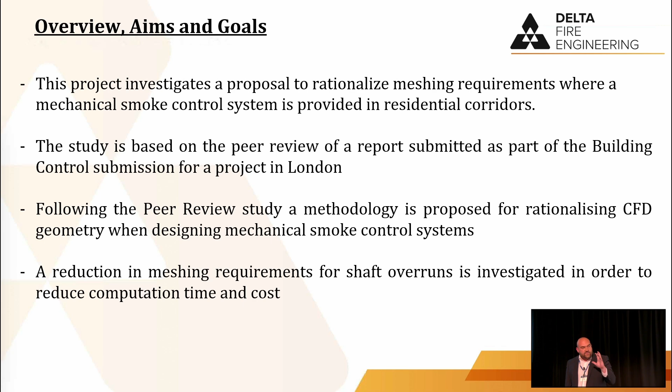So for anyone that was here yesterday, I said that what I like to do at the start of all my talks is to convince you why you should care about the next 13 minutes, 45 seconds. This study, I'm going to skip over this one and come to this slide, is really intrinsically related to this fire, the Grenfell Tower fire. Now, I'm sure we're all aware of this one. Certainly if I was doing this talk in London, everybody would know. Loads of people I speak to were there. I was there the night that the Grenfell Tower fire happened. I lived in London. I went down to the fire, saw it firsthand.

Our industry changed overnight, certainly in the UK, practicing as an engineer in London. It was a huge seminal event for us. 2 weeks ago, we got the final inquiry report. Our industry changed again overnight 2 weeks ago. The reason that we're so interested in residential fire safety and residential modelling, which is what my talk is about today, harks to this incident, and this highlights some of the issues that can go wrong when things are designed incorrectly.

The Grenfell Tower fire. Grenfell Tower itself was constructed back in the 1970s. It was overclad in the early 2010s, with a combustible material. I'm sure that this narrative is familiar to us all. On the 14th of June, 2017, a little over 7 years ago, a fire happened in a refrigerator in flat 16, which broke the window, melted the UPVC, spread to the external cladding, and engulfed the building.

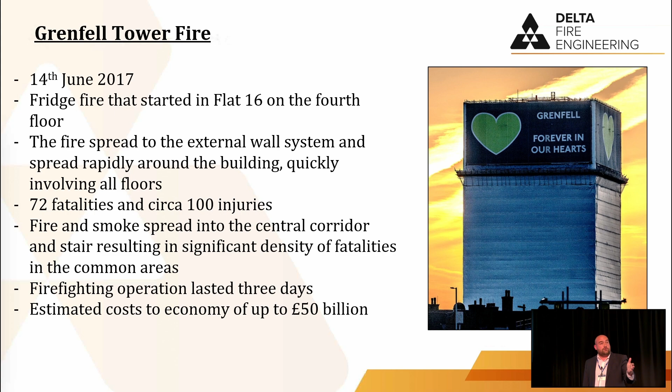72 fatalities, 71 of which were on the night, 1 was later, and over 100 injuries. The estimated cost that's been released recently to the UK economy is upwards of 50 billion, with a B, 50 billion pounds. The UK government themselves have released 5 billion pounds to reclad buildings similar to Grenfell across the UK, and that's a huge package of works at the moment that we're seeing in our industry.

So as I say, I always try to sharpen the mind a little bit to see why we care about this subject. I added a couple of slides last night, actually, based on some discussions I had with some of you guys. I'm acutely aware I'm not in the UK anymore. I'm very much in Kansas. And some of this is not known. So a really quick run through of how this works for us in the UK, our building regulations. It's one slide, I'll do it in 10 seconds.

Our requirements are completely functional, which means we are told what we have to do, but not how to do it. So our functional requirement for fire safety for all buildings in England and Wales, and Scotland in fact, consists of 5 things. We have 5 requirements for fire safety, called B1 through B5. B1 is means of warning and escape, B2 is linings, B3 is the structure, B4 is external fire spread, and B5 is access and facilities for the fire service.

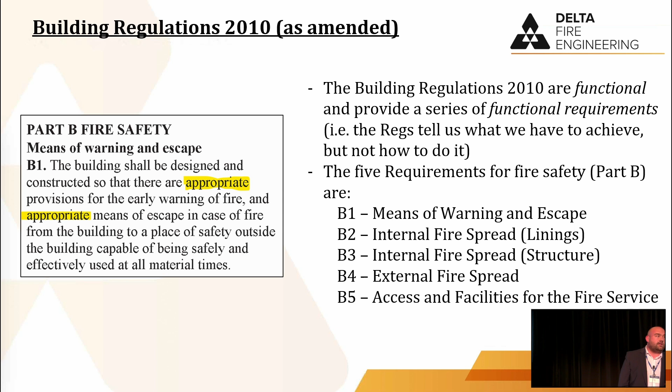And what that requirement actually consists of is what's on screen there. That's our entire legal standing in the UK for fire safety for means of escape. It's one sentence. We design buildings around that one sentence. If we are prosecuted for breaching it, we are prosecuted for being in breach of that one sentence. And the word I always highlight in there is appropriate. Appropriate is not defined in the UK regulations, or in any guidance, really. It's up to us as designers to define that ourselves.

And when we are doing that, again, this is a very quick summary before I get into some of the bits we've looked at for this piece of work, we broadly have 3 approaches. We have codes and standards as we'd have anywhere in the world. Our Approved Document B is our standard prescriptive guidance approach, and we can design buildings to meet that guidance. It's inferred that if we follow that guidance, we are satisfying our legal duties under the building regs, and we can follow that established code of practice.

Alternatively, the job of an engineer, which is what I consider myself to be, is to do performance-based design. First principles, what we're all talking about here in our presentations and in the bar afterwards. True engineering from first principles. And the other type of design that we may undertake is comparative analysis. We do a benchmarking exercise.

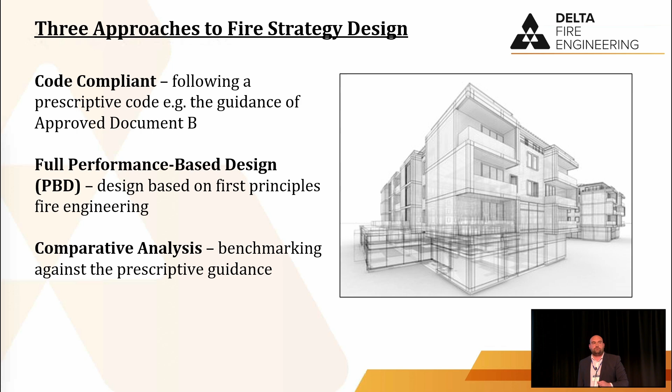If this is the level of safety that would be accepted under prescriptive guidance, and we can demonstrate that we are as safe or safer than that guidance, we've carried out an engineering judgment and said that this meets our statutory duty. So far, so straightforward, I think. And I'm going to hone in on that comparative analysis for the rest of this talk. So, Approved Document B looks like this. This is what it would tell us for design of a single stair building.

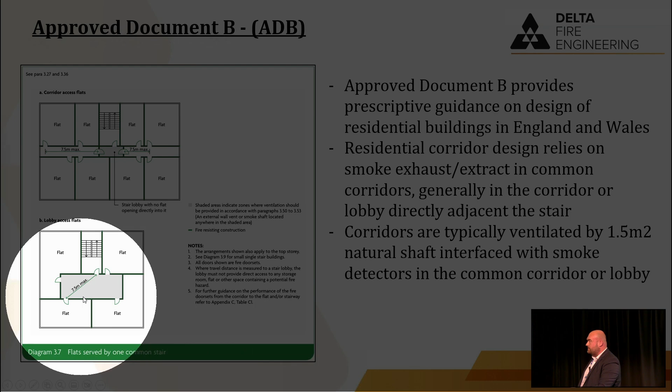The image down at the bottom there, I'm going to try to do a Rishon here. How did you do the thing where you get the click? Look at that. No one told me this yesterday. I was waving my arms around yesterday. I watched the video back. I look like a right muppet. Anyway, I found a button. There we are. That one there, okay?

Standard single stair resi design that we would have up and down the UK. It's exactly what Grenfell was designed to be. In actual fact, the image in our guidance looks distinctly like Grenfell Tower. 4 flats around a central lobby serving a single stair. And our design would look to ventilate that corridor.

So anything that's in grey in our guidance, we would ventilate. And we have a standard approach for this under our guidance, which is to have a natural shaft opening, 1.5 metres squared. We ventilate via that. That's interfaced with the fire alarm system. If we get smoke in the lobby, that opens and it ventilates naturally. There's no fan, there's nothing else, it's just a vent.

Traditionally, it came about when we had PPV, positive pressure ventilation, for the fire service. They would come in with a fan set that they'd place and you can ventilate that way. There are only 2 fire services in the UK that use PPV anymore, but we still design buildings like this, and we may in fact put a mechanical system in, which is what we're going to come on to here.

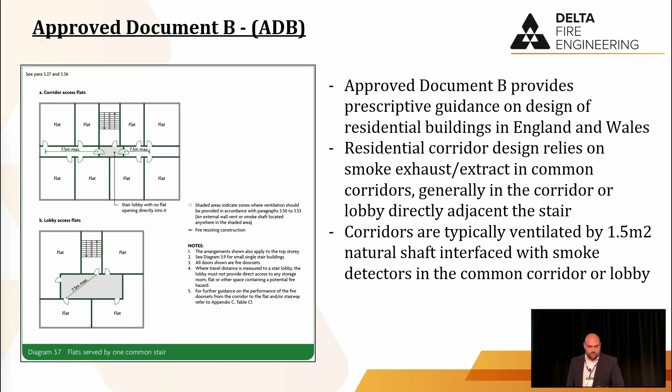So, mechanical smoke control shafts, big part of our work, certainly that I use with my consultancy side of the business. One thing I didn't touch on that I wanted to at the beginning is about our research work. The research that we do in my organisation is slightly unique. Within my team I have a research group, various research assistants, and all my engineers do research alongside their consultancy work. We are largely self-funded. If the SFPE would like to give us some money, you are more than welcome. But we do broadly self-fund all of our research, which means a lot of it is related to our consultancy work. I press into my guys massively.

What we're interested in is what we call solutions-based research. When they put a bid into us for internal funding, the first question I ask them is, do we care about the answer? It's not just a piece of research that's kicking something along. It's not something that doesn't take us anywhere. What's the answer going to be? Do we care about it? Are we going to use it? And that's how we got onto this piece of work here.

This is a model of a building that we didn't work on, actually. This came to us for a peer review. Now, peer review is something that's increased significantly in the UK. Anyone who practices in the UK will probably have seen the same thing. Very often, we'll be brought in as a secondary consultant, completely independent, to review another consultant's work, usually by a building control authority, a building control officer, or a fire authority, to review the work and give it a second sign-off. And this is what happened here.

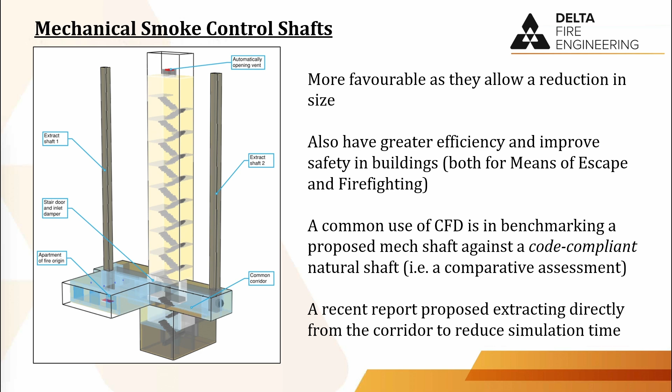So we received a piece of work where somebody had designed a mechanical smoke control system, and they had done that benchmarking against the natural shaft. So they'd said, this is what a natural shaft would do, and this is what a mechanical shaft would do. Ours is better, ergo, safe, we've met our duty. And the way they did that was through doing some CFD modelling using FDS, modelled a natural condition, and modelled a mechanical system iteratively until it was better. But they did something different that we'd never seen before. And I'm going to come back to that after a quick case study.

Fast forward a couple of days. Only a couple of days separate these two anecdotes. And we were doing some CFD modelling commercially in my business, not as a peer review, it was our own piece of work, at Admiralty Arch. Is anyone familiar with Admiralty Arch? Yeah? A bunch of us familiar with Admiralty Arch.

If you go to London and you come out of Buckingham Palace, as we all do, of course, because we're all Brits, we all go there for tea every day.

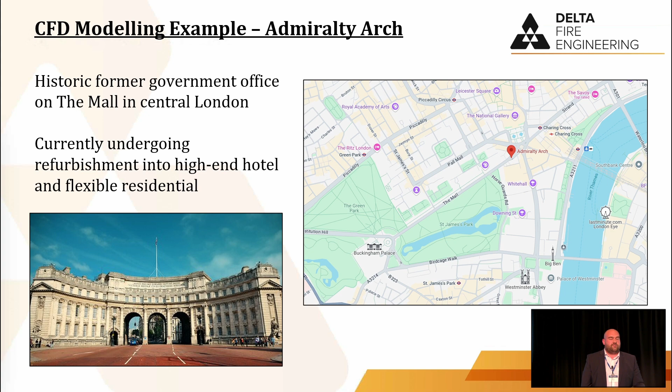You come out of Buckingham Palace, you go right down the Mall, it's the big bridge at the other end, the big arch. It used to be the entrance to Buckingham Palace. And it looks like that. It's a former cabinet office where the Admiralty were based, so the Royal Navy were based there. And it's currently undergoing some refurbishment. They're turning it into a top-end hotel and some fancy apartments. So we were engaged to do some CFD modelling on this particular building.

And what we were modelling is 10 different scenarios, 10 different cases throughout the building, and we were modelling the firefighting shaft. Now, in this part of London, there are lots of tunnels, and there are lots of secret things going on underground. This is right next to the Cabinet War Rooms, Churchill War Rooms. And underneath there are huge basements in this area, 5, 6-storey basements, which for London is quite deep. There's not much going on in London in terms of that depth of development, certainly not these days.

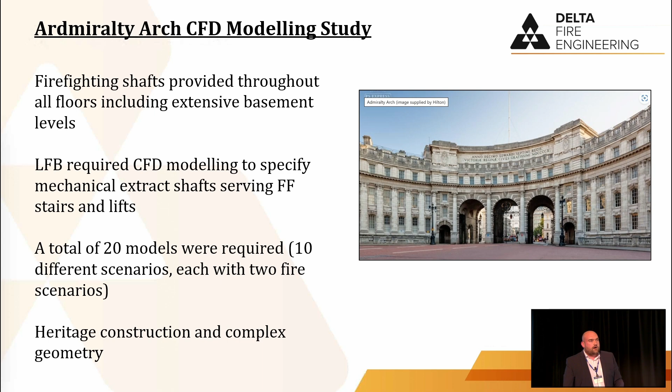And one of the issues we have there for firefighting is how we ventilate those lobbies in the event of fire. It all warrants mechanical systems, so we were modelling each of these shafts. And it resulted in having 10 different scenarios, 2 fires per scenario, so 20 models that looked something like this.

So this is an example of one of the basement stories. This is basement level 4. This is the pool and sauna room. Not a lot of fire risk, but nevertheless we had to do some modelling, so we were being paid. And we had to design the mechanical shaft. So what you'll see is that in this particular building, we've got a stair with a shaft next to it.

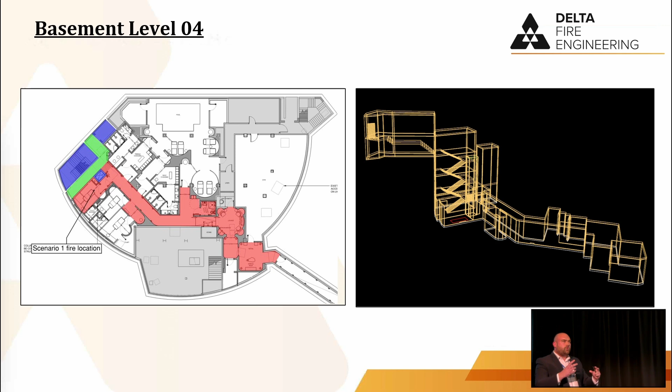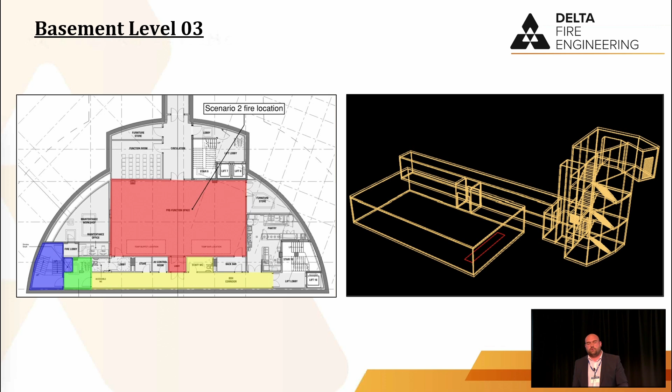The kind of environment itself that we're modelling, in this case the pool and sauna, and the fire service ingress. So we had these really weird kind of rabbit warren models that we were doing. The scenarios and geometries were all kind of obscure. This is another one. This is basement level 3, the floor above. Again, we're modelling the full fire service ingress, we're modelling the ventilation system and the environment itself. In this case, it's the ballroom.

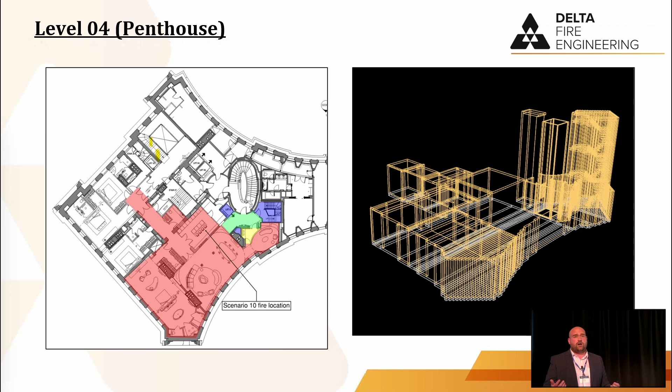And we became quite interested in rationalising this geometry to make our lives a bit easier, because we had 20 models to build of a very, very complex building. One thing you'll note about Admiralty Arch is there's no straight lines. Everything's curved. So it just added another element of complexity for us. So we're really interested in this rationalisation. And 2 days prior to this, as I've already said, I got a report land on my desk from another consultant. And what they had done was rationalise their geometry in a novel way.

Now what they'd done is they'd modelled a corridor, like so, with a big long 30-metre shaft, 10-storey shaft next to it with a fan at the top of it, which is exactly as it would be installed. And they presented a case, and this is the crux of my talk really, this idea of a case study. They'd presented a case that said, because it's a completely enclosed shaft made of concrete with a fan at the top, we have a complete mass balance between the top and the bottom of that shaft. There's no leakage paths.

So what they'd actually done is they'd modelled that for the sake of the report, and then they ran the models like this. They put a vent on the outside of the corridor and extracted directly from there and said, we don't care about the shaft. We're going to rationalise our geometry, reduce it down. We have a mass balance, so it doesn't matter. And we became quite interested in this, because this could save us a huge amount of time on the Admiralty Arch project. So we thought that we can adopt this if it works.

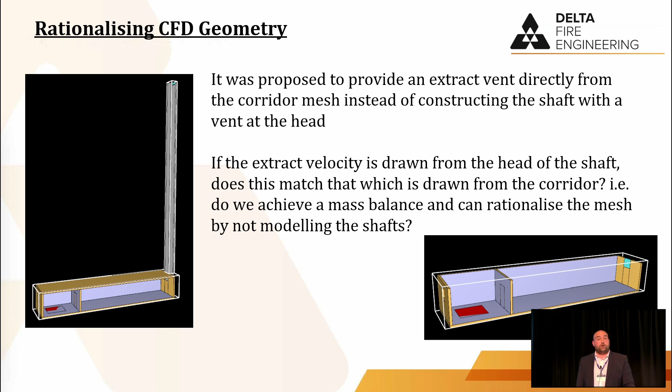So we ran some sensitivities ourselves of this. I don't know if anyone's ever seen this sort of modelling, but it's crept in and it's used occasionally. I see students do it. We became interested in, do we have a mass balance? Is this something that is valid? Do we care? Does it work? So these are some of our models.

You'll usually see it's one of my models because it's got a black background. In the Pyrosim results viewer, I always change the background to black so I can tell it's my work, not someone else's. Not to suggest none of the rest of you can. It's not a great invention. It's just you change it to black. But if I'm modelling theirs and theirs is grey, I can tell my work from theirs if I'm doing a peer review. It wasn't supposed to be a big show-off piece, that, but I'll take it.

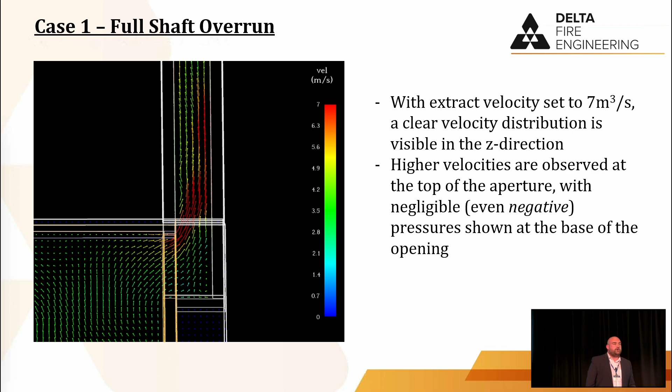So we modelled here a full extract vent, and we modelled the velocity plot. We were interested in the velocity profile across the aperture, and it looks something like that. We can see that we've got high velocity at the top of the vent aperture and low velocity at the bottom. In actual fact, we get negative velocity profile at the base of the shaft.

When you model directly from the corridor geometry, you don't get that profile whatsoever, because of course what happens is your vent gives an even velocity distribution profile at the top of the aperture as it does at the bottom of the aperture. So it completely disproportionately represents how much extract you're getting from that corridor. What it actually does, funnily enough, I laughed at least, it makes the conditions worse, remarkably, because it actually draws your smoke layer down and recirculates it and introduces vortices in there that you wouldn't otherwise have.

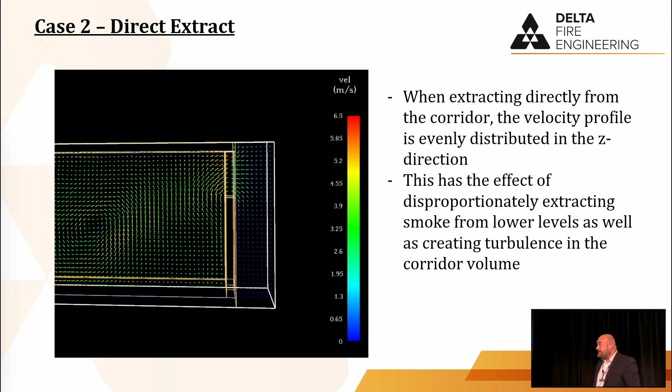So, modelling those two side by side again, we were able to prove really, really quickly that actually this isn't a rationalisation. This is a cheat. This is something that somebody's tried to do and they haven't really thought about it and done a quick sensitivity on it.

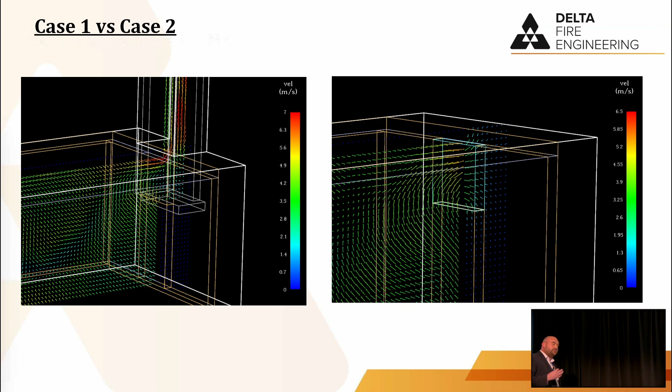Now, I'm going to have to rattle through quite quickly because I've just missed my timing. We're into the Q&A session.

It looks something like this. This is from our work. We've taken this forward to try and solve this and work out, actually, can we come up with a rationalisation from this? You'll see in case one, when you have a full shaft that's modelled, what you end up with is a high velocity profile in approximately the top 20 to 25% of the aperture. Beneath that, you get about 50% of it where you have mid-velocity, and down at the bottom you have low, possibly negative, but negligible velocity is quite common. Whereas if you model directly from an enclosure, directly from the compartment, you get an even velocity distribution, which is not what we expect to happen in a real scenario.

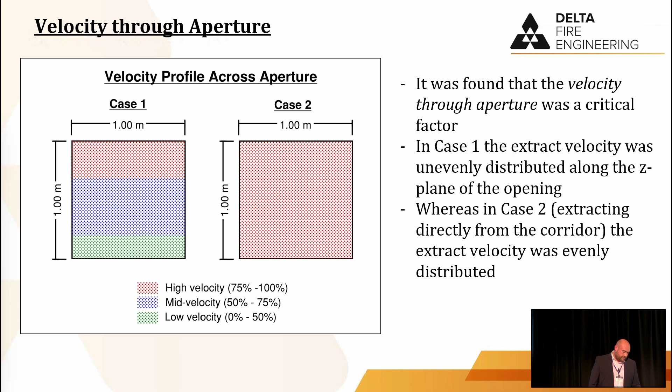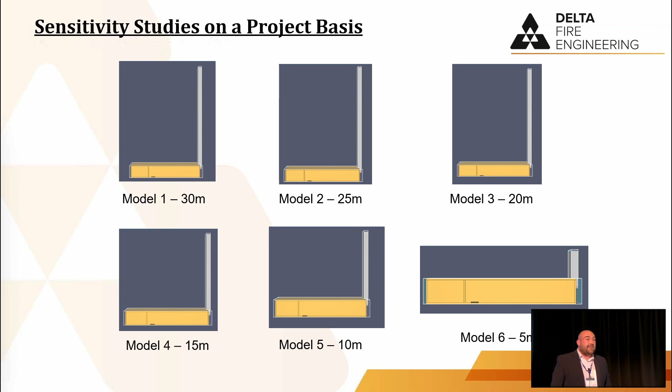Where we've taken this now, we have a next step to this project that we're producing a paper for that will be circulated, but essentially on a project basis, if I can have an extra 30 seconds, I'll get to the conclusion. What we found is that actually you don't have to model the whole geometry. You don't have to do the whole shaft. There is a golden number. We don't know quite what that is yet, but there is a threshold at which point you must model the whole shaft, but it isn't the full shaft in its entirety. What we found is it's proportionate to the extract volume that you have and the volume of the corridor or the volume of the space that you're ventilating. Not the travel distance, not the length, but the volume. And between those two, you can do a sensitivity and find that you model less of the extract shaft and you do get to rationalise your geometry.

On the Admiralty Arch project that we had, we saved between 5 and 7% of simulation time, which doesn't feel like a huge number, but across a large project with 20 models, actually it did save us quite a few days in the end. The way we did that was by doing sensitivity tests of each extract shaft at each extract velocity, worked out the point at which we saw no difference to if we'd modelled the shaft in its entirety, and we were able to do these sort of reduced, rationalised models and save ourselves quite a bit of time in the process.

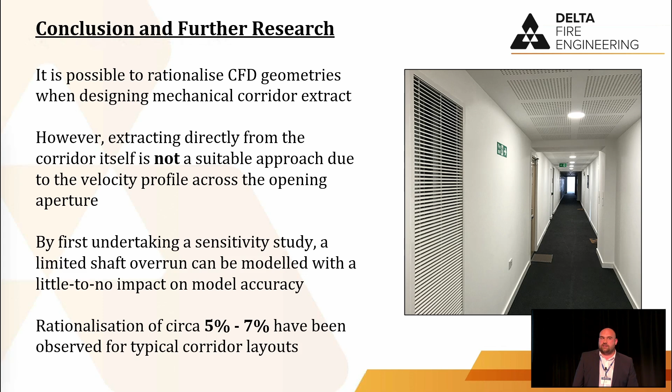Now, where we take this next, we are working on a formula for this, myself and my colleague, Renee Goosen.

Now, Renee, I think, might be watching this from home. So this is either called the Hart-Goosen formula or the Goosen-Hart formula. All good academics know that that is a constant argument. We have decided, we have negotiated, if it works, it's called the Goosen-Hart. If it doesn't work, it's called the Hart-Goosen. And you will see we're on our third iteration, and it's back to not working. We're currently at Hart-Goosen. If you see it published and Goosen's name is first, it means we've cracked it.

What we're trying to do is come up with a formula, a nice little correlation to say, this is how much of the extract shaft you must model based off the extract rate and the volume you're trying to clear. We're having some success. It comes in about 5 meters above, which is a huge rationalization over a 30-meter, 10-story corridor. So, watch this space for the Goosen-Hart or Hart-Goosen formula, and a bit of a case study in there about how we kind of take something for granted if we are reviewing it, and the benefit of doing sensitivity studies, I suppose. And that's me.

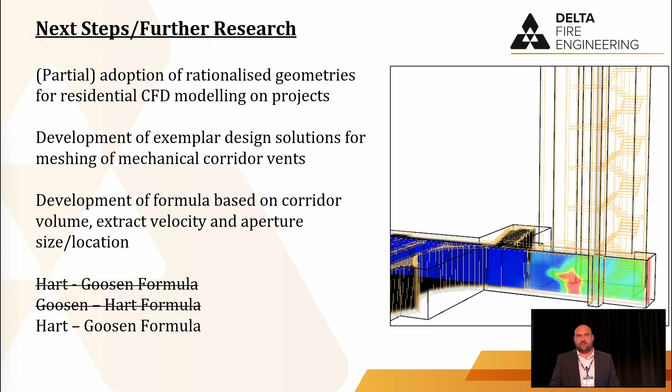Thank you, Joe. Great. Great talk. Questions? Okay. Oh, yeah. I'm going by proximity and not order of hand raise.

There you go. Not that I don't love having fun with FDS and doing what you're doing, but have you ever considered just looking at a simple HVAC duct model where you've got a kind of a big duct?

Your hallway is sort of a big duct leading into a vertical duct, and just looking at airflow and losses through the duct and all that sort of thing. I mean, would that help? It may do. The problem we tend to have is that we have a vertical shaft built and we've got that sort of dog leg directly next to where we have it. So it's that pressure boundary you get as it turns that corner. Right. So we have to replicate that. So if we're doing that, we might as well model the shaft rather than do something any more complex.

Yeah, and they do have, what do you call them, nodal losses, but exactly what that is in your case, it's hard to say. Okay, thanks. Yeah, thank you.

That was really interesting. I guess the follow-up question I have is, did you try just making the shaft a coarser resolution, make it a factor 2 coarser, and you'll probably get the same simulation speed up doing that? Curious on the sensitivity. Yeah, we tend to avoid doing that, only because we don't want to put our mesh interface at a critical part of the geometry, so where we have that extract that's coming, and the reason for that is because that's where we have the AOV that opens. So generally we try to avoid doing that.